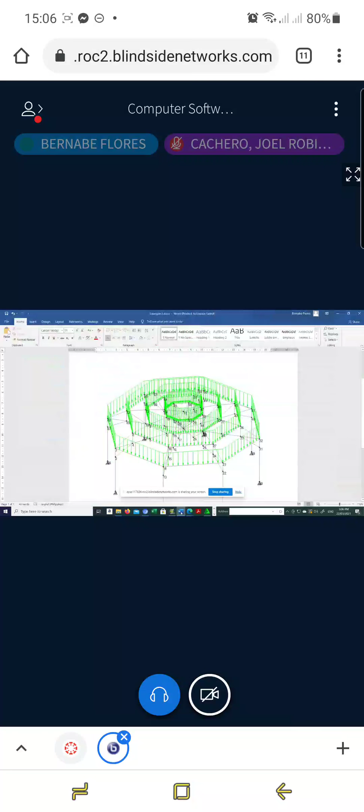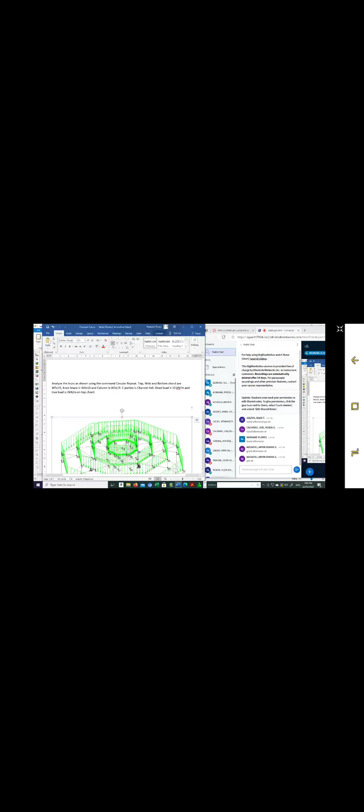Okay, so our example here is we have to analyze a truss which is three-dimensional. So from here, we have the command circular repeat. Okay, so analyze the truss as shown using the command circular repeat. Top, web, and bottom chord are W5 by 15, or that is wide flange 5 by 15. Then knee brace is 4 by 13, and column is W5 by 19.

So purlins are channel 4 by 6. And dead load is 10 kilonewton per meter. So the dead load will be acting on the purlins. So it acts on the purlins. And live load is 2 kilonewton per meter. So that is on the top chord.

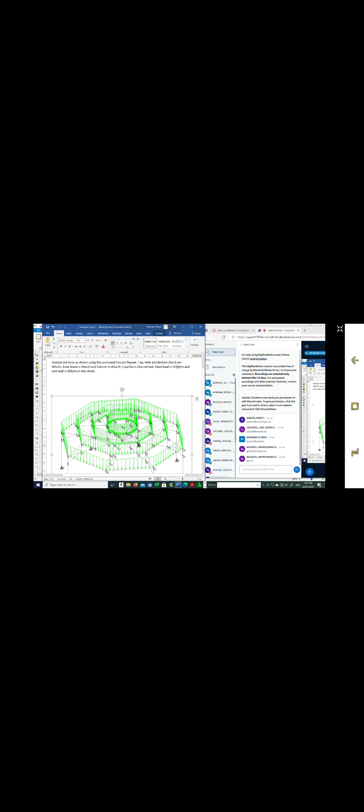Okay, so you can see that this is some type of a structure that is circular in nature. So, for example, these structures are like a cockpit arena. Okay, so the frame there is steel frame. Okay, so you have to open now your STAAD, the V8i. Then, we will perform this together.

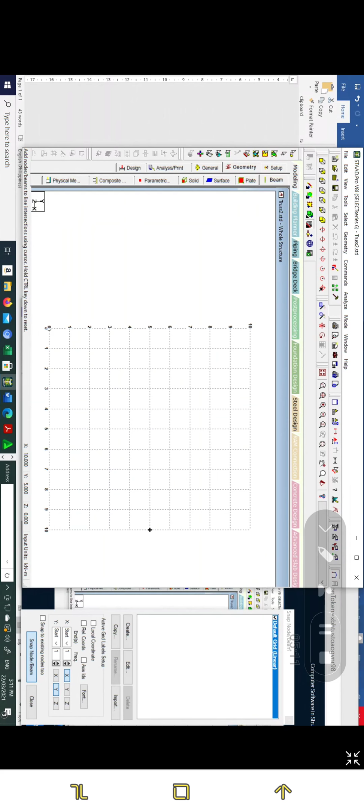Okay, from our screen, we have to view this in the z-axis. So, let's click the z-axis so we can view it. Okay, I won't put the dimension there. The height of the column is 5 meters, then 4 meters from the knee brace. And the spacing of the members is every 2 meters. Then the top chord at the middle is 2 meters high. Next to the middle, that is 1.9. Then next to that is 1.6. Then at the edge, 1.2.

Okay, so we will use now the cursor. Then we check on the snap node beam. So we've checked it, then we can see that the point now will be on the grid line. So if we start at 1 meter, this is the 1, then 4 meters is the height of the column. Then we have 1 meter for the knee brace. So every 2 meters is the spacing of the panel. The panel in the middle is 2 meters. Then the panel next to the middle is 1.9.

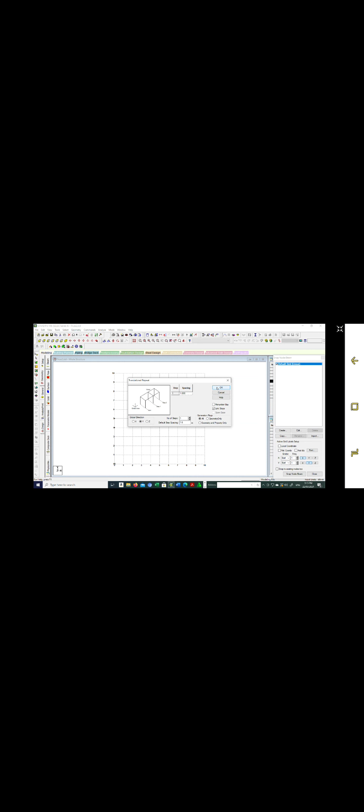So we use translational repeat. Then the height there is 1.9. And let's click link steps. Then okay. Y direction. Then okay. So there it is. Then for the next joint, the height there is 1.6. So we select the joint, then translational repeat, then Y, then 1.6. And link steps, okay. There it is. Then the other one, the height there is 1.2. So use translational repeat, then y-axis, then 1.2, link step, then okay.

So we connect now the members. These are our members. That is now the top chord. Then we have the web here. So just click on the node, then connect to the other node. Then we have that one. Then the knee brace, this is the knee brace. Then our support, the support there is hinge, pin connected. So we don't have a support here yet.

Okay, what we have to do is click on the support page. We don't have a support here yet. Then let's create. We have here pin, fixed, then pin. That's the pin. Then add. So let's click the support. Then highlight our support. Then assign. Okay, so for our members, we don't have member properties yet. So we have to go to the property page. This is the property page.

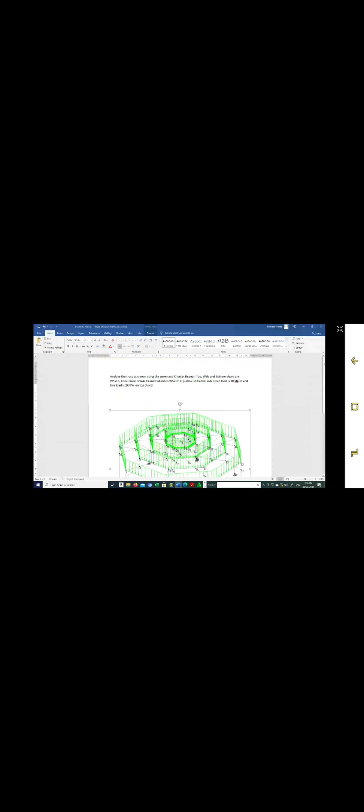Okay, so since we're using steel sections, we have to use this section database. That's the section database. Okay, so we have now this one. Then our column is W5 by 19. So let's check the column here. Okay, 5 by 19, there it is. Then add. Then the other one is the top chord, the bottom chord, and the web member. Our section there, we have the top chord, bottom chord.

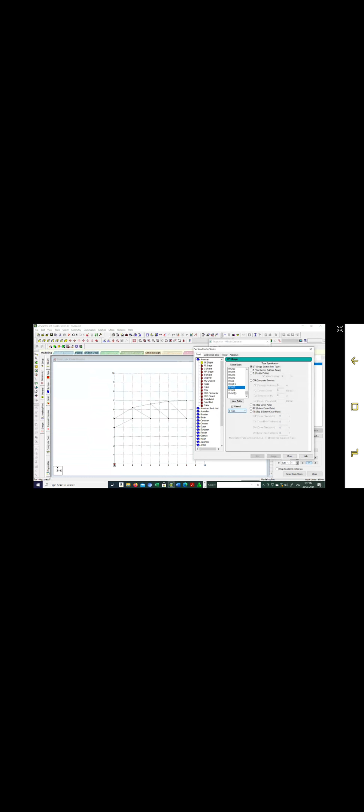Okay, top chord, web, and bottom chord are 5 by 16. Knee brace is 4 by 13. And the column is 5 by 19. Then top chord, bottom chord, and web are 5 by 16. So, back to STAAD. Okay, so we have here 5 by 15. 5 by 16. So, okay, this is 5 by 16. Okay, so we have 5 by 16, there it is. Then, add. Then our knee brace, we have 4 by 13.

Okay, so, yung huli, we have the C purlins, o yung channel yung purlins natin. And the section of the channel is channel 4 by 6. Okay, so papalit tayo ng channel. Okay, we have here the channel. I-click natin yung channel, then locate natin yung 4 by 6, then add. Okay, so yung channel is 4 by 6. Okay, so nakompleto na natin yung section.

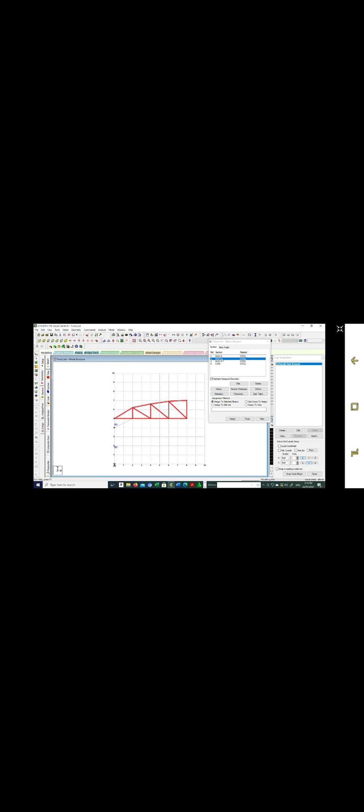So what we have to do now is designate. Yung 5 by 19, that is the column. Okay, so use beam cursor. Ito yung beam cursor. Then, i-check natin yung column. Naka-highlight yung column dito and assign. Then we have 5 by 16. Yan yung top chord, bottom chord, and the web. And na-highlight na natin yung 5 by 16. Then assign. Then check.

Tapos yung knee brace, ito yung knee brace. Then the section is 4 by 13. Check natin. Then assign. So ang wala pa dito is the purlins. But the purlins will be acting at the nodes. So dito sila nag-act. So we have the node 5, yung node dito, then yung node doon, at saka yung node doon, then dito.

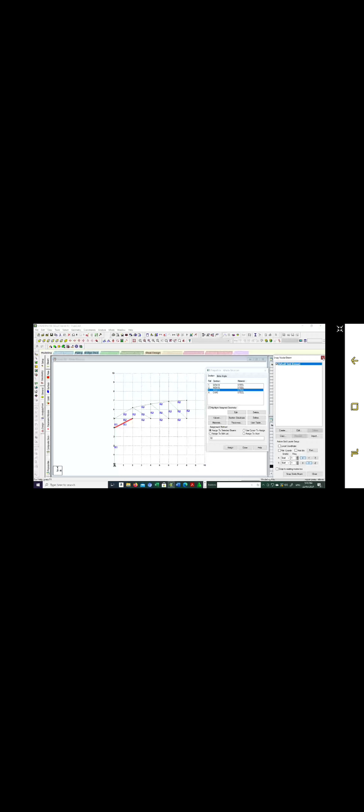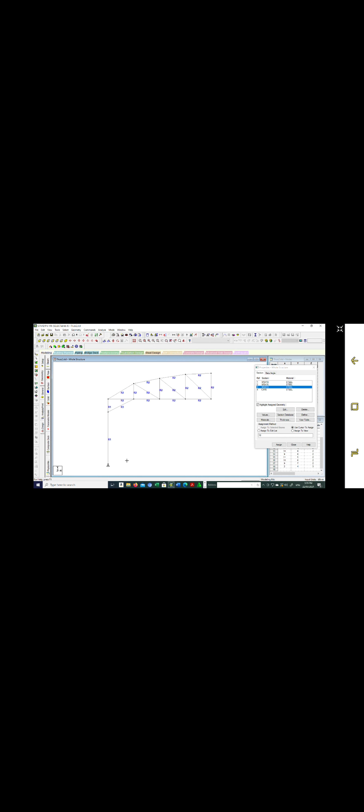Okay, so tanggalin na natin itong grid lines. If we view the 3D, ito yung 3D natin, or the display of the whole view. So ganyan yung makikita natin, kasi nasa isang plane pa lang siya. Then, we make sure na naka-view tayo sa Z. Then, i-select natin ito lahat. Na-select na natin lahat.

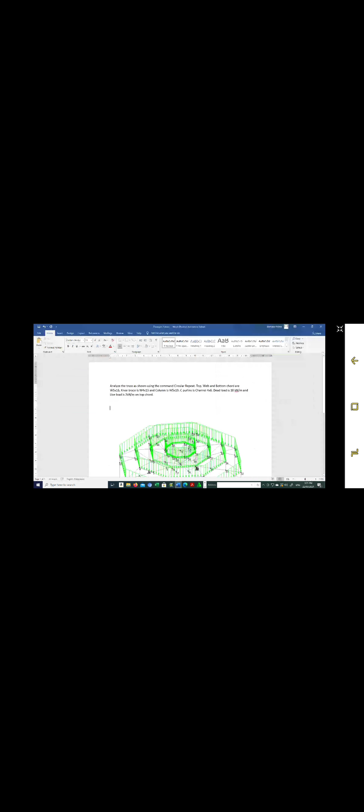Then, we have to make use of the circular repeat. Pag clinick natin yung circular repeat, makikita natin itong box na ito. It will produce yung circular repeat natin from start up to the end. So ang start natin is 0 degree, hanggang 360 degrees. Then we have 8 frames. So we have 1, 2, 3, 4, 5, 6, 7, and 8.

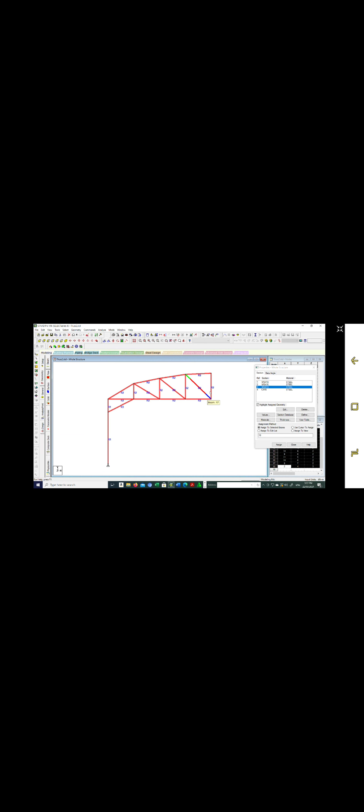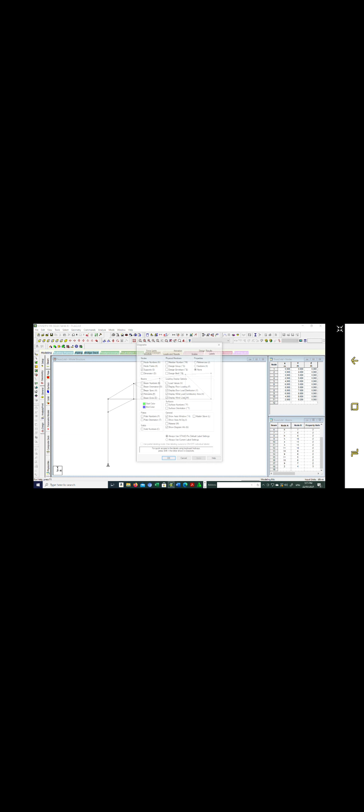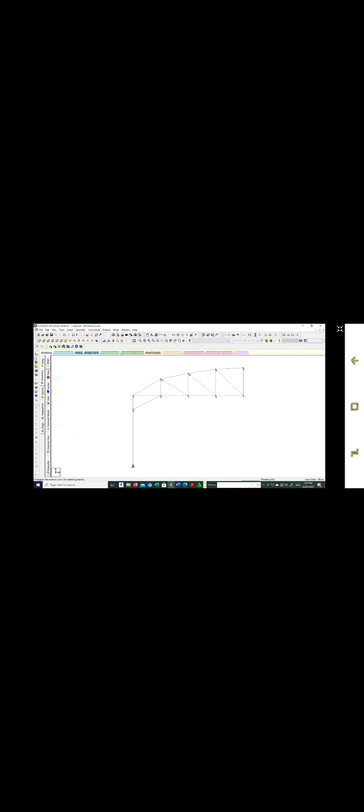Okay, so what we have to do now is i-determine natin yung mga joint. Okay, so huwag muna pala doon. Dito natin palabasin yung mga joint. Dito we have Shift K. Ayan, yung control and shift N pala. And then select na natin all the members.

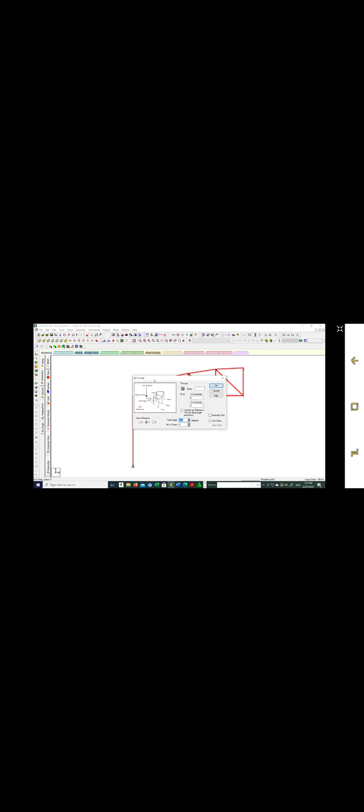Then balik tayo dito sa circular repeat. So the number of frames na gagawin natin dito is 8. So palitan natin ito ng 8. Then magro-rotate tayo sa Y. So the axis of rotation is Y. Then ang node natin, it will rotate along node number 8. So i-click lang natin doon ng 8. So from that, we will now be able to create the 8 frames. Then i-check natin yung okay.

Or pwede pa tayong mag-click ng link steps pag gusto natin. Pero wag na lang kasi pag click natin yung link step, lahat yung mga joint dito mag-create ng link. Pero ang kailangan lang natin na may link will be joint 8, 9, 10, 11, and number 3. So therefore, hindi na natin i-click yung link steps.

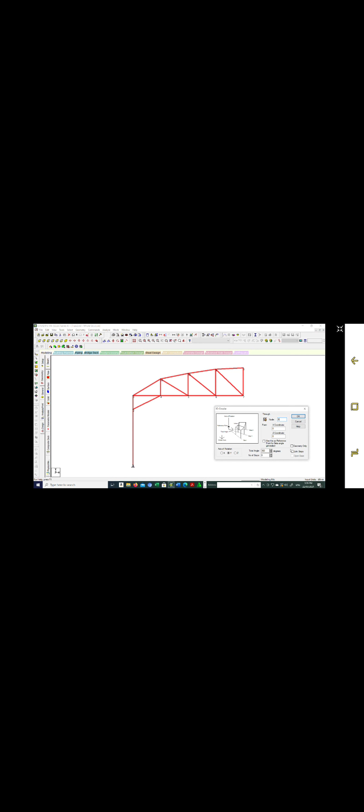Okay, so we have node number 8. Then we have 8 frames na i-create niya. Then the total angle is from 0 to 360 degrees. Then i-click na natin yung OK. Na-create na yung frame natin. So if you view this in 3D, yun na yung frame natin.

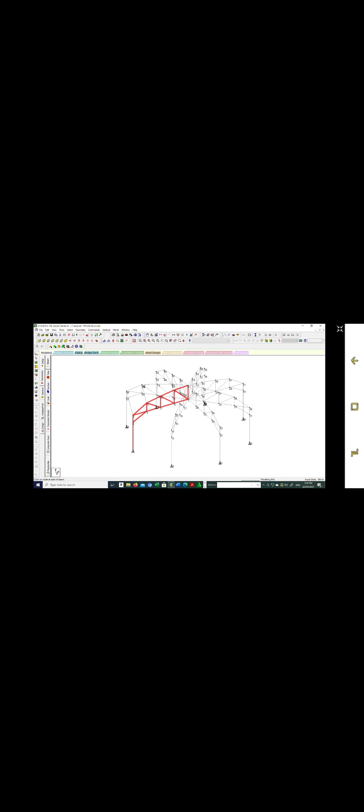So what we have to do now, para sa purlins natin, we click on add beams. Then ito yung i-click natin. We have that one. Then ito naman. Then we have this one. Yan yung point doon.

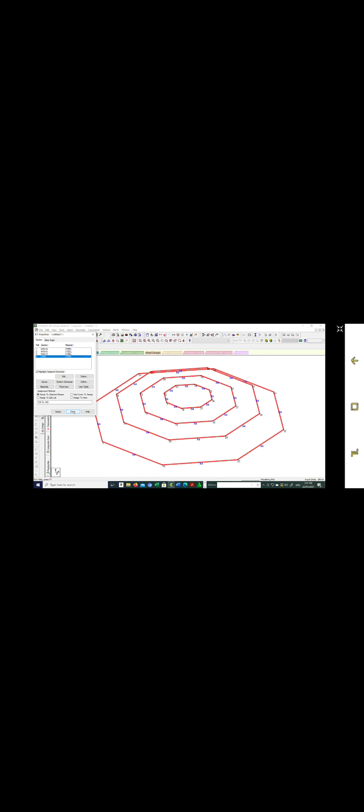Okay, so highlight all the members. Na-highlight na natin. Then the property page, ito pa yung wala. Ito pa lang unahin natin. So we have to select this one, then select all the members. Then we have assign. Then yes. Okay, so na-assign na natin yung mga members. Then pwede natin siyang i-close. So display all the members. Ayan na siya ngayon. So we have now the structure.

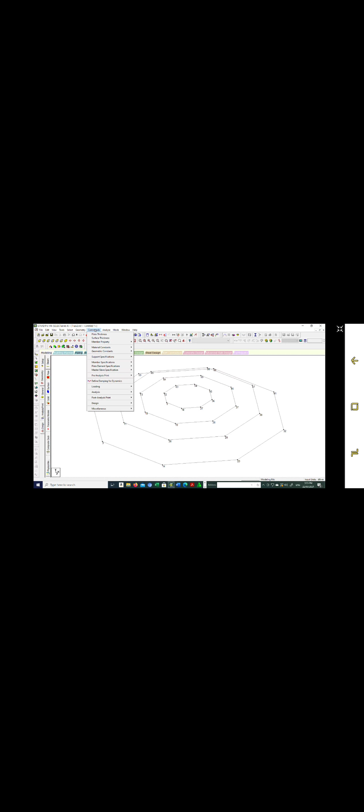So from that, pwede na tayong maglagay ng load. So from the command, ito yung command, then define loading. So yun yung loading. Then primary load tayo. Okay, so we have dead load. Dead load yung una. Then add. Tapos yung susunod na load is live load. Then add. Then exit tayo. So from the load case, mag-add tayo. We have the dead load.

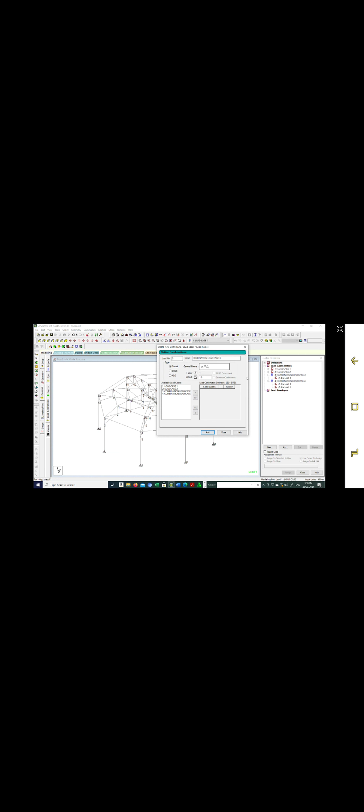Then ang susunod is load number 4. So ang load number 4 natin is load case number 1 and that is 1.4. Palitan natin ito ng 1.2. Then we have that one. Then load case number 2, palitan natin ng 1.6. 1.6 naman siya. And that will be the combination of the live load. And this will be the load number 4 natin or load combination number 4. Then add. So napasok na natin, then we can now exit this one.

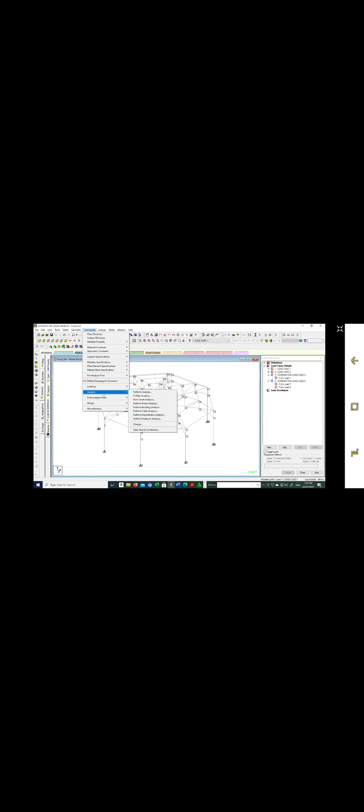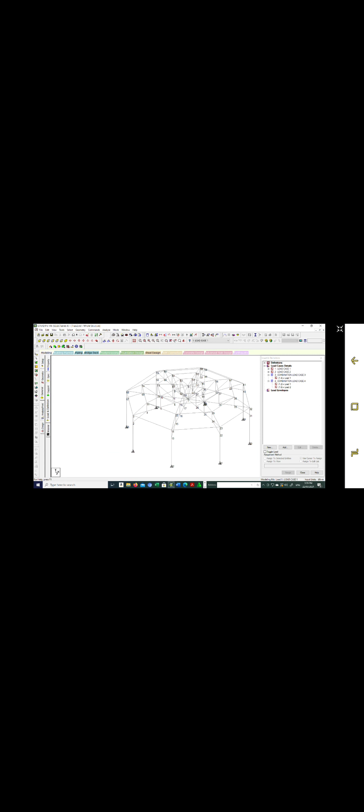So after the loading, we are now ready to analyze. Okay, so yung command, i-check natin. Then we have analysis. So analysis, then perform analysis, then okay. Okay, so from that, tapos na yung frame analysis natin. And we can now go and analyze. Run analysis, then save. Okay, so tapos yan ang analysis natin. So we can now go to post-processing mode.

Okay, so yan yung processing mode. Then we have this one now. Okay, so makikita natin ngayon yung frame natin, and we'll now be able to determine the stresses on its member. Okay, so yan yung bending niya. Actually, meron ng mga bending dito. And shear bending, load case 1, bending on Y. Walang bending on Y. Merong bending along Z. So ayan siya. We have also shear along Z, 0, shear along Y. Yan naman yung shear niya along Y.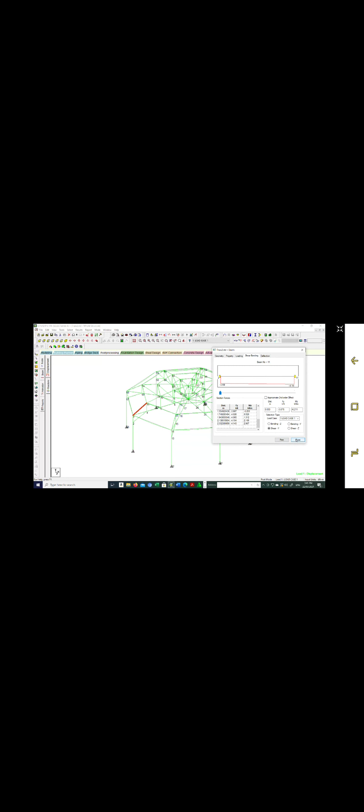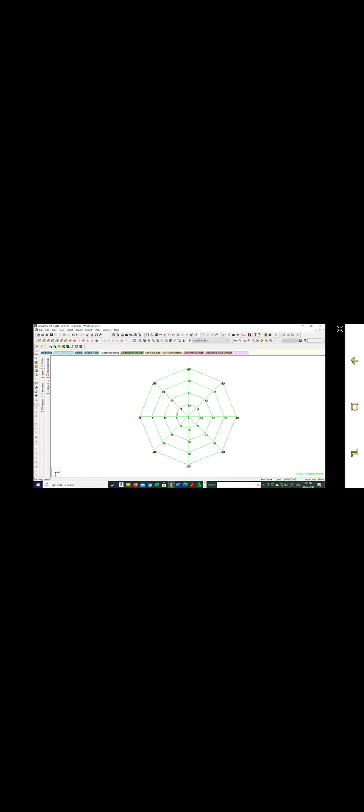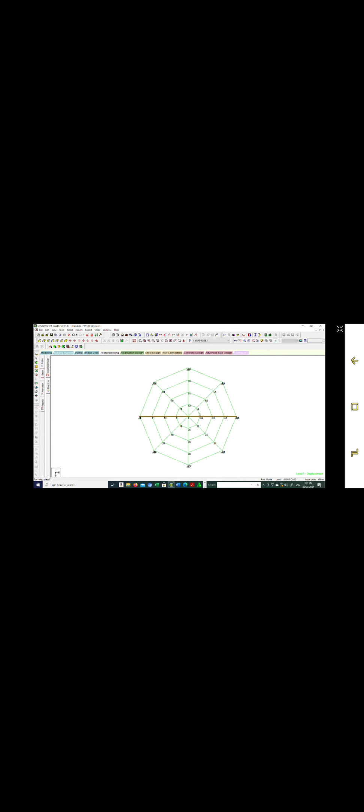Okay, so if we have to determine the axial forces, kasi axial force naman ang kailangan natin, then i-view natin from Y, ito yung Y. So actually pwede nating kunin kahit isa lang since isa lang naman yung mga load nila. And we can have this frame here, itong frame na ito. Then new view. Okay. Then ito. So bali yan na yung frame doon. So yung forces natin on the member, yung axial force, hindi natin makikita dito. The axial force can be determined on the report. So yung report kasi nandun yung axial load.

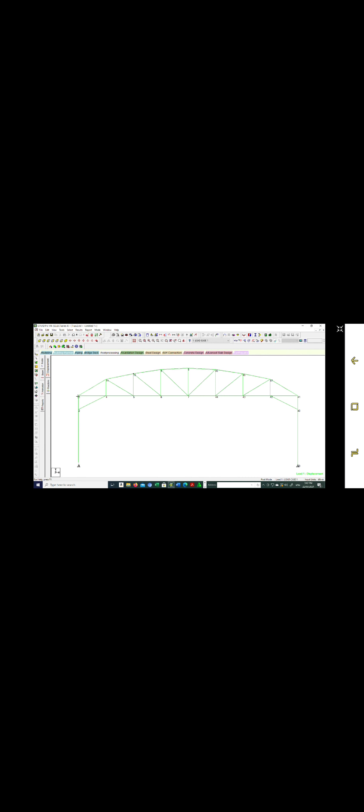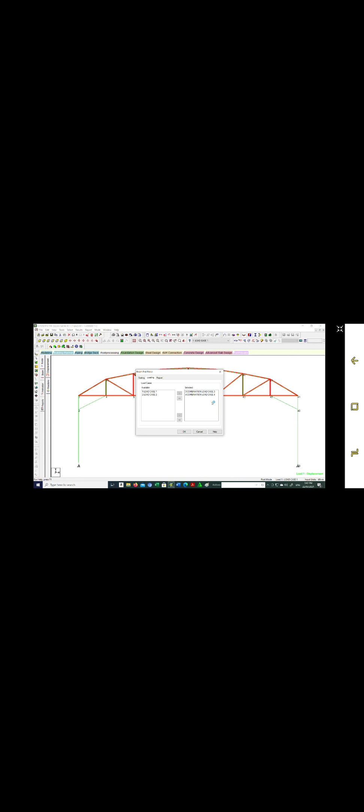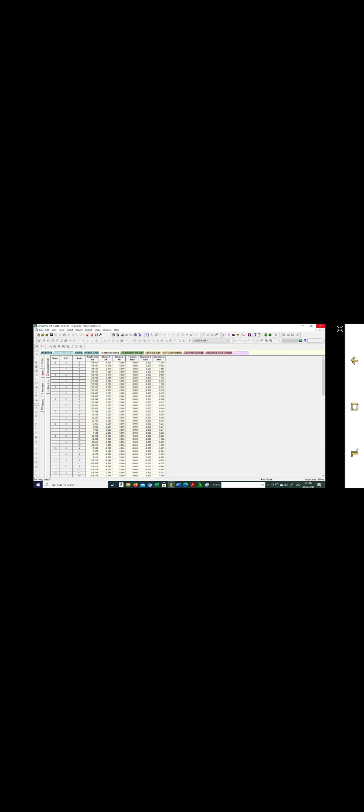So if we have to consider this one, yan yung mga member natin. So report, then beam end forces, loading. So tanggalin natin yung load case 1 and load case 2. Then what we need is the combination. That is the combination of dead load only at saka combination of dead load and live load. So we have now this one, okay. And ito na ngayon yung axial force nila. Okay, so we have beam number 3, axial force 188 kilonewton. Beam number 3 is 188 tension. Ito yung beam number 3, and that is in tension.

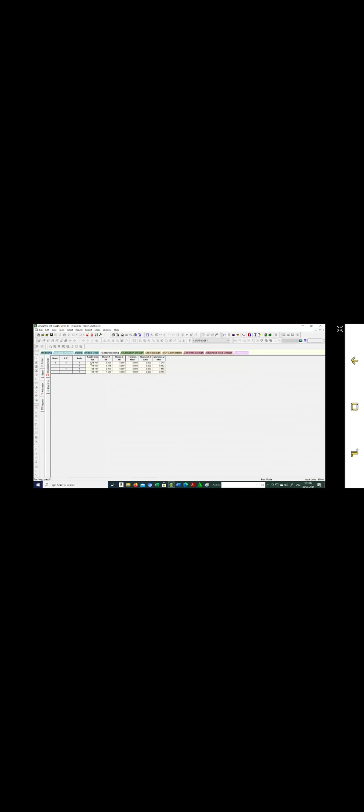Okay, so beam number 3, report natin, select, then beam end forces, loading. Tanggalin natin yung load case 1 and 2. Then okay. Iyan, the axial force na. I told you before that the axial force will be, instead of the first number, on the second number. So imbes na negative 176 dyan, it will be positive 176. That is on load case number 3. And load case number 4, instead of negative 188, that is positive 188.

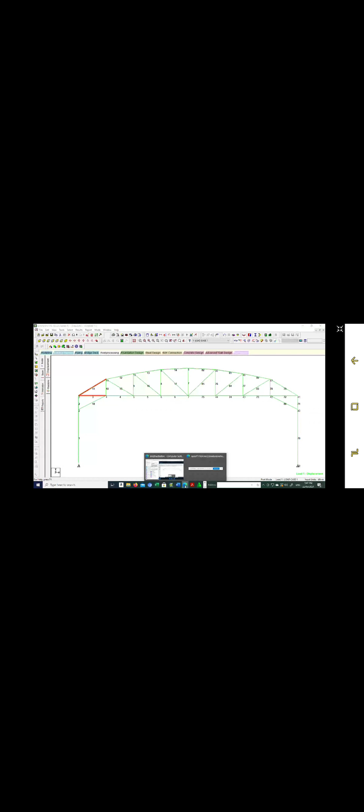Okay, so 11 is the compression member and 3 is the tension member. Okay, dito na. We have the tension member, ito yung tension member natin, and that is the compression member. Okay, so meron bang tanong sa frame natin? Kasi pag isa-isa, mahirapan ka dito. So that's why I present this, yung circular repeat. Okay, may tanong ba?